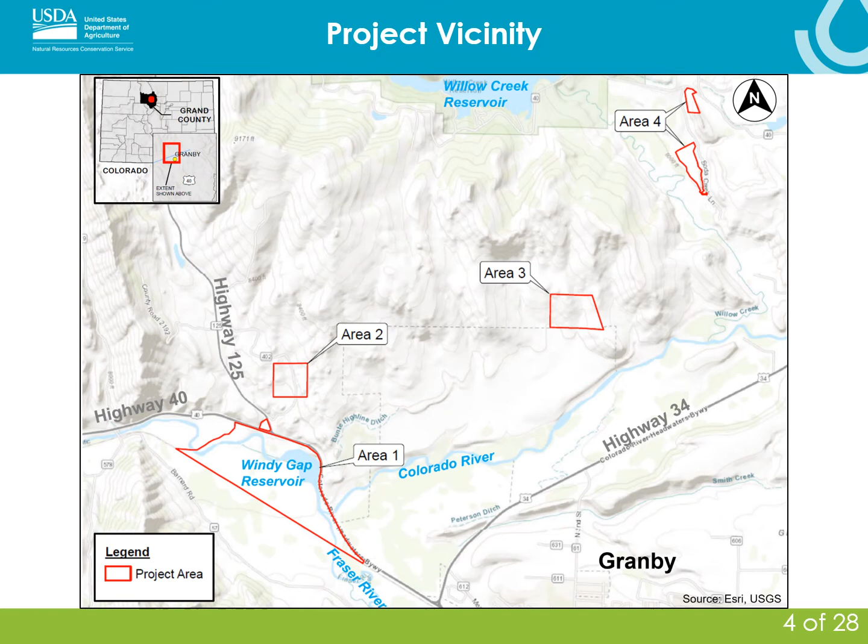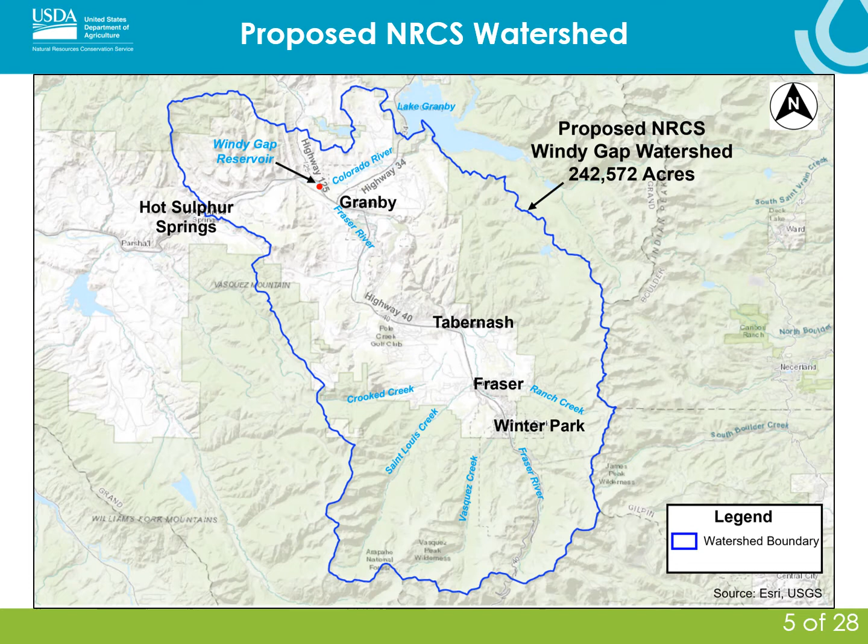Anyone who is not familiar with NRCS or the NEPA process may have some questions at this point, such as, what is a Plan EA? Why are we writing a Plan EA? And what is the purpose of this draft Plan EA meeting? Our job is to inform you as much as possible about this process, and hopefully this presentation will answer your questions. If not, please contact the project team with any additional questions you may have after this presentation.

Since project actions are being funded partially by the NRCS, the federal government, through the Watershed Protection and Flood Prevention Act, also referred to as PL 83-566, an environmental analysis is required to comply with federal regulations. These federal regulations include NEPA and the Council on Environmental Quality Regulations. NRCS complies with these regulations in the form of a watershed plan and environmental assessment. Since that is a mouthful of words, we simply refer to it as Plan EA for short.

A draft Plan EA has been prepared and is currently out for public review and comment. The purpose of this meeting is to provide all interested parties, both agency and public, information on alternatives analyzed in the draft Plan EA, present the results of the environmental assessment, answer questions you may have, and encourage interested parties to submit comments on the draft Plan EA.

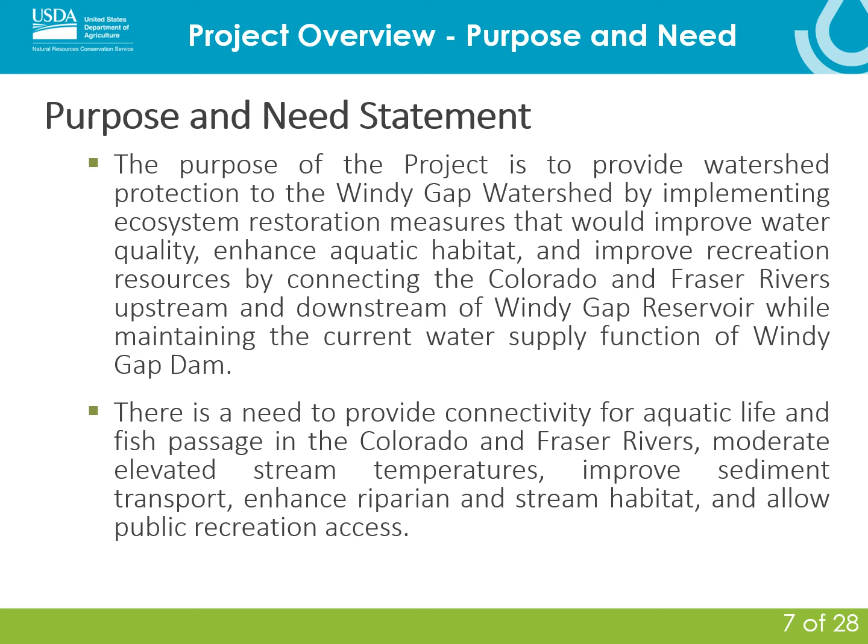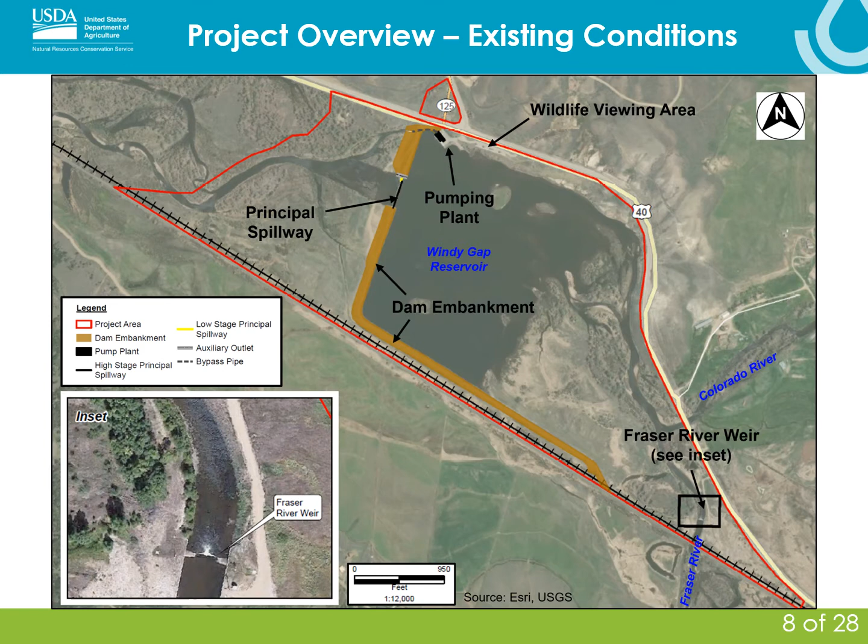In order to meet the purpose and need, the existing conditions of the project area were thoroughly assessed. This assessment consisted of the existing infrastructure as shown on the map. The main components consist of Windy Gap Dam embankment, principal spillway, the pumping plant, Windy Gap Reservoir, and the Fraser River Weir. The existing condition assessment identified that Windy Gap Dam and Reservoir block and impede aquatic life passage upstream in the Colorado River.

The reservoir reduces coarse sediment transport downstream that is conducive for aquatic species habitat and has resulted in stream bed armoring. The reservoir has disrupted normal stream flow through the creation of a slack water environment, resulting in aquatic habitat degradation and increased water temperatures. The existing condition assessment also identified that the Fraser River Weir blocks and/or impedes aquatic life passage upstream in the Fraser River.

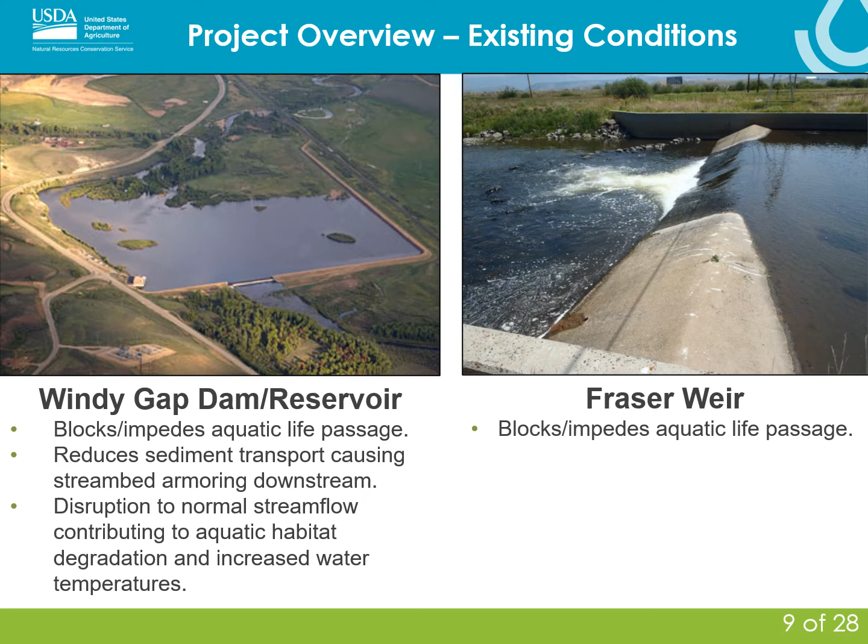A detailed analysis of the project area existing conditions, also referred to as the affected environment, is located in Section 4 of the Draft Plan EA. In order to meet the project purpose and need, multiple alternatives were developed. Many of these alternatives were eliminated from detailed study due to infeasibility, logistics, exorbitant costs, not meeting the purpose and need, or other critical factors. Please refer to Section 5.4 in the Draft Plan EA for detailed information on alternatives eliminated from detailed study.

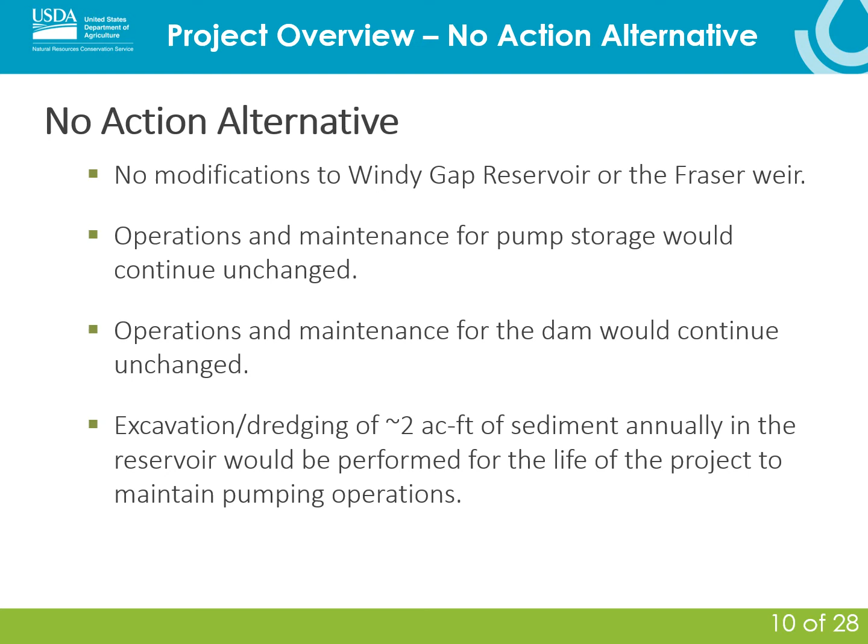Alternatives considered for detailed study in the Plan EA are discussed in Section 5.5 and consist of a no-action alternative and one action alternative that meets the purpose and need for the project. The no-action alternative consists of not modifying any components of Windy Gap Reservoir or Fraser River Weir. Operations and maintenance for the pump storage and dam would continue unchanged. Excavation or dredging of the reservoir would be required to remove approximately 2 acre-feet of sediment annually to maintain current pumping operations for the life of the project.

The action alternative presented in the Draft Plan EA is also the preferred alternative for the project. Specific ecosystem restoration measures that would be implemented in Area 1 include dam modifications, construction of a connectivity channel, and modifications to the Fraser River Weir. Project measures in Areas 2, 3, and 4 consist of borrowing clay, gravel, and rock to construct the alternative measures outlined in Area 1.

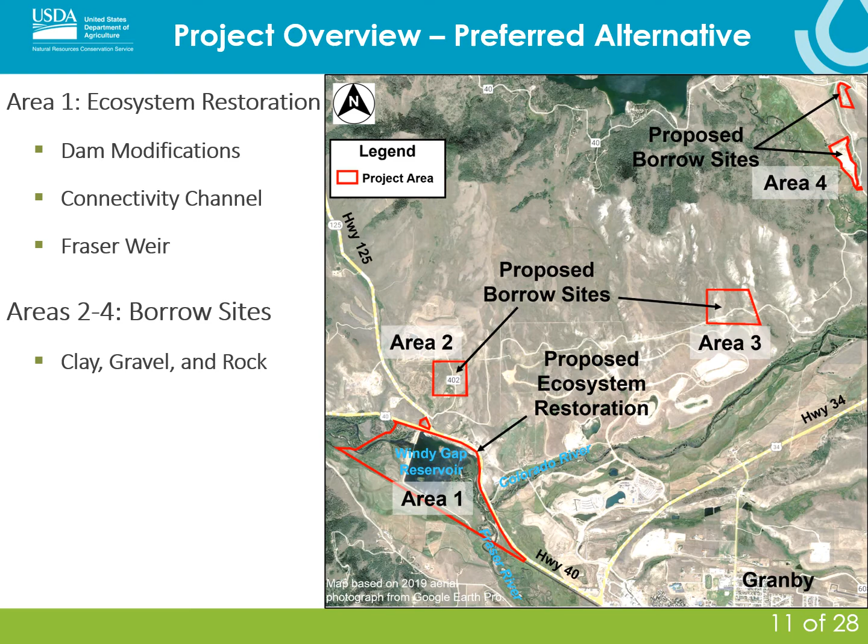Modifications to the dam would be required to separate the reservoir from the connectivity channel. Prior to the start of construction, the reservoir would be lowered so that work would occur on the dry. A portion of the western dam embankment would be removed while the southern alignment would remain in place. A new dam embankment would be installed through the center of the existing reservoir and would match the existing dam embankment. A new overflow spillway would be installed on the upstream portion of the embankment, which would be activated only during flood events. Since the reservoir surface area is decreased, the principal spillway low stage would be raised by 1 foot to match the existing high stage elevation.

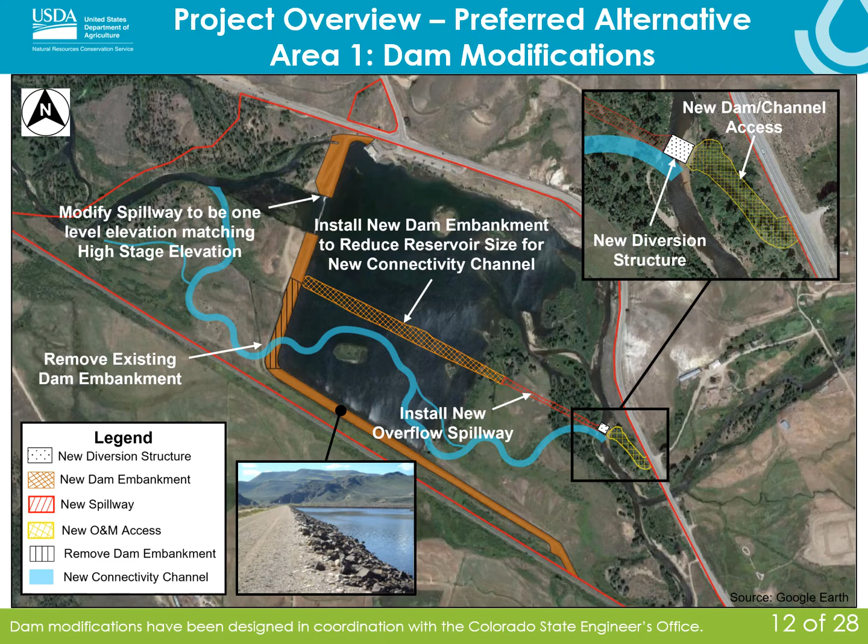A new diversion structure would be installed at the upstream end of the embankment near Highway 40, which would control water flowing into the reservoir. The new connectivity channel entrance would be stabilized with a rock control section and sheet pile installed below the channel surface. A new adjustable gate would be installed along the Colorado River, which could be lowered to allow flow into the reservoir during operations or flood events. A new access road would be constructed off of Highway 40 and a vehicle bridge installed over the diversion structure to allow for operations and maintenance access.

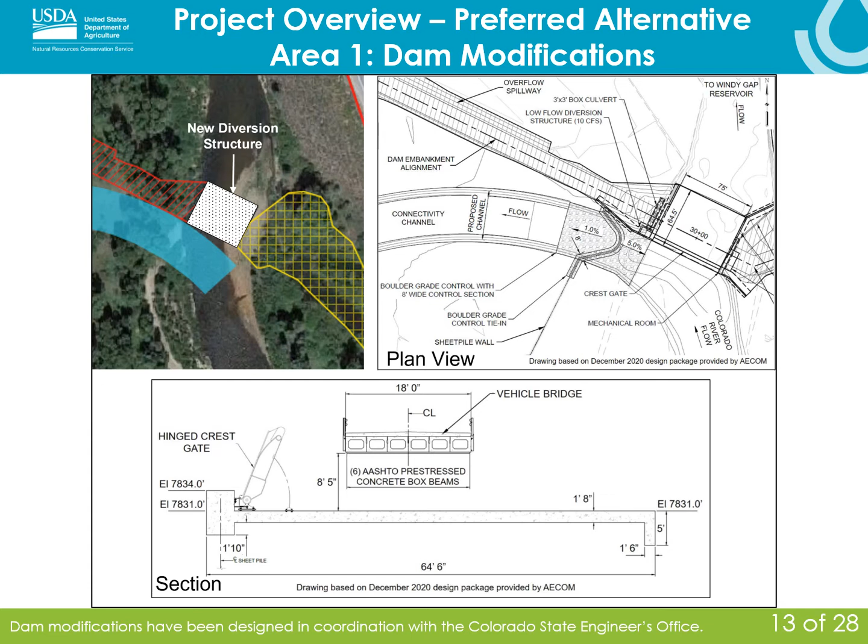A new connectivity channel would be constructed in the area between the old and new dam embankments. This new channel would function as a typical stream channel with associated side channels and floodplain features incorporated into the design. As part of the channel construction, a new riparian corridor would be reconstructed with wetland, riparian, and upland vegetative plants. The existing banks at the downstream outlet would be stabilized to prevent erosion. Overall, the connectivity channel will result in a net increase of 5,580 feet of stream channel, net increase of 18.28 acres of wetland, and net increase of 19 acres of riparian habitat.

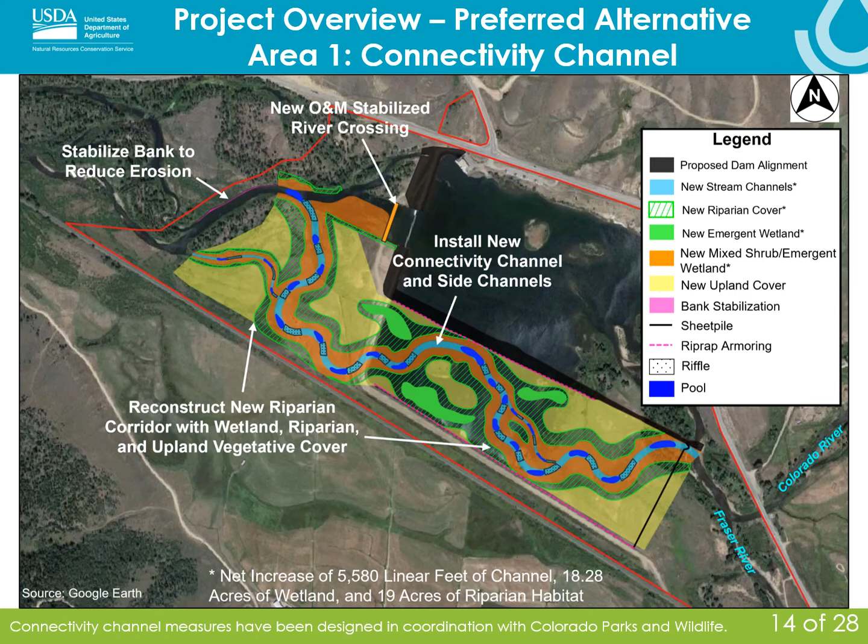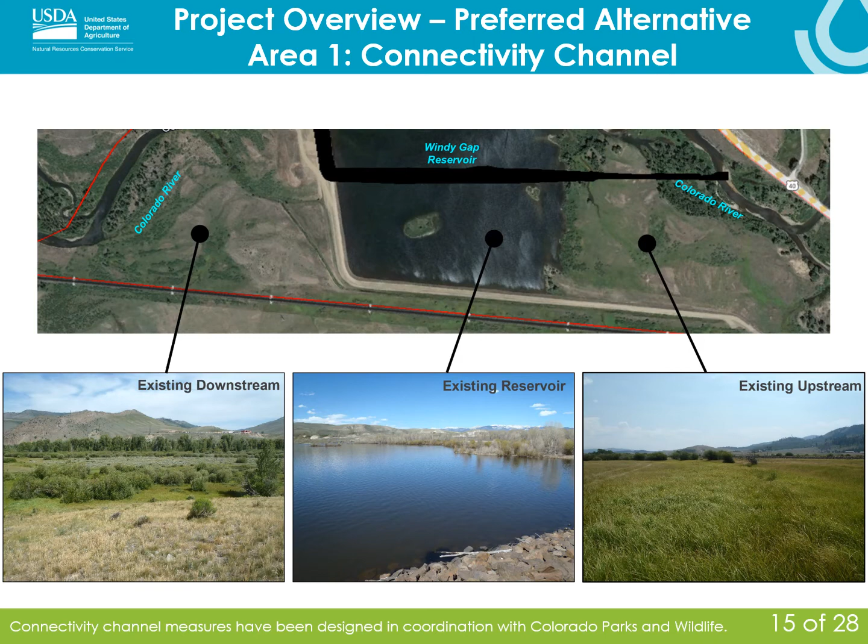The existing conditions of the proposed connectivity channel alignment consist of three different types of cover. Upstream of the reservoir contains open wetland and upland meadows. The reservoir contains solely open water, and downstream of the reservoir contains a mixture of wetland and upland shrubland.

The proposed conditions in the connectivity channel combine the existing conditions, excluding the open water reservoir, into a healthy functioning riparian corridor. The picture shown is an example of the Colorado River upstream of the reservoir that has not experienced the degradation from the installation of the dam as previously discussed.

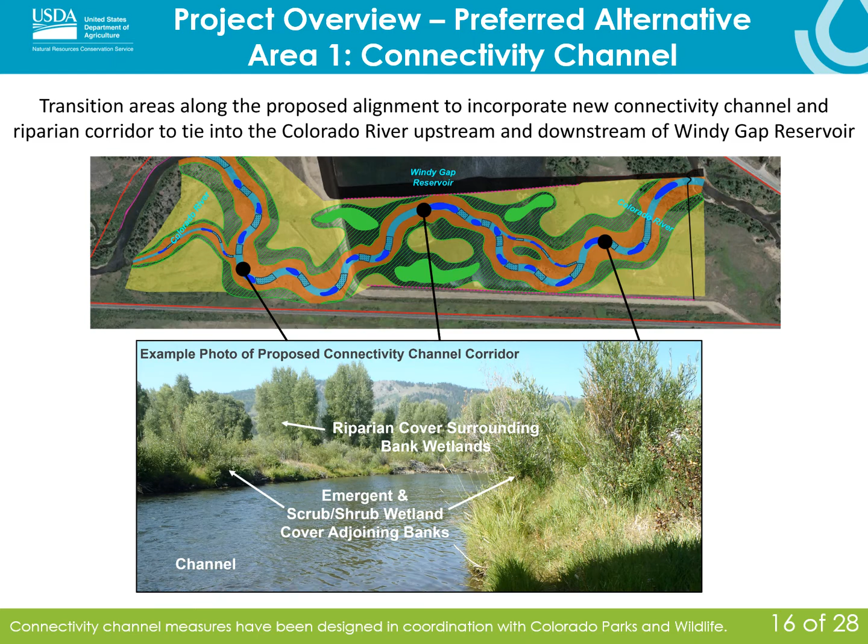Modifications to the dam embankment and construction of the connectivity channel are anticipated to create a thriving riparian corridor containing stream channel, wetland, and upland habitat. This new area is expected to become excellent habitat for fish and wildlife.

Northern Water, who is the landowner, is proposing to open this area for public recreation in 2 phases. The area shown in dark pink adjacent to the reservoir will be open for public recreation after construction completion. The operations and maintenance access road off of Highway 40 would be open for public access.

Note, the official opening for public recreation will depend on the success of vegetation establishment and may occur 1 or 2 years after construction completion. The reason for this delay is to ensure that vegetation has had sufficient time to become established before recreation activities would start that may disturb vegetation along the new connectivity channel.

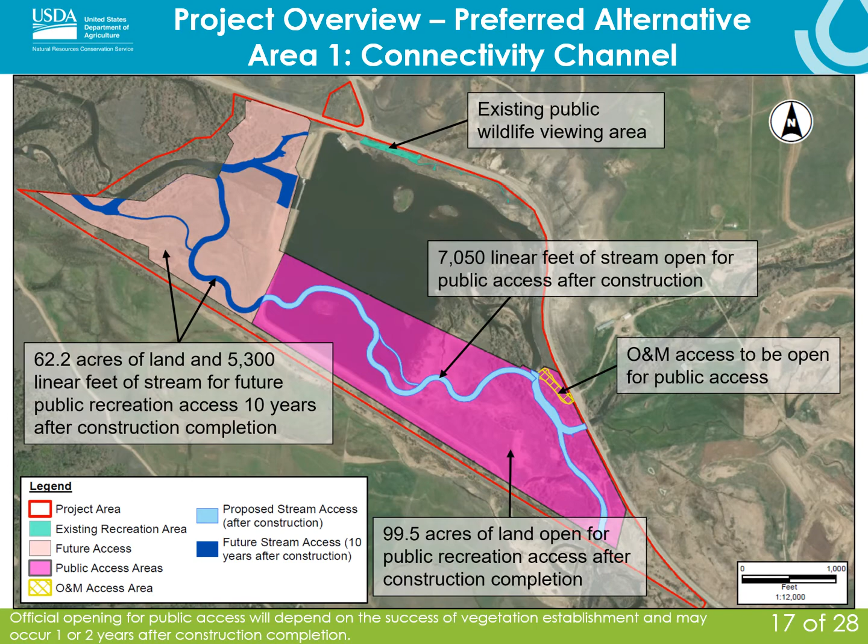The area shown in light pink downstream of the dam would be open for public recreation access 10 years after construction completion. The existing wildlife viewing area on the northern side of the reservoir would be open to the public during and post-construction, and there are no modifications proposed for this area.

Measures are also proposed for the Fraser River Weir, which currently blocks and impedes aquatic life passage. Measures would be installed to provide upstream aquatic life passage through the installation of 2 rock weir structures downstream of the existing weir and regrading the channel bottom.

The existing weir would be left in place and flow monitoring of the Fraser River would still be maintained. In addition, a new vehicle crossing would be installed in the bottom of the channel for operations and maintenance activities, as there is not a crossing currently at this location.

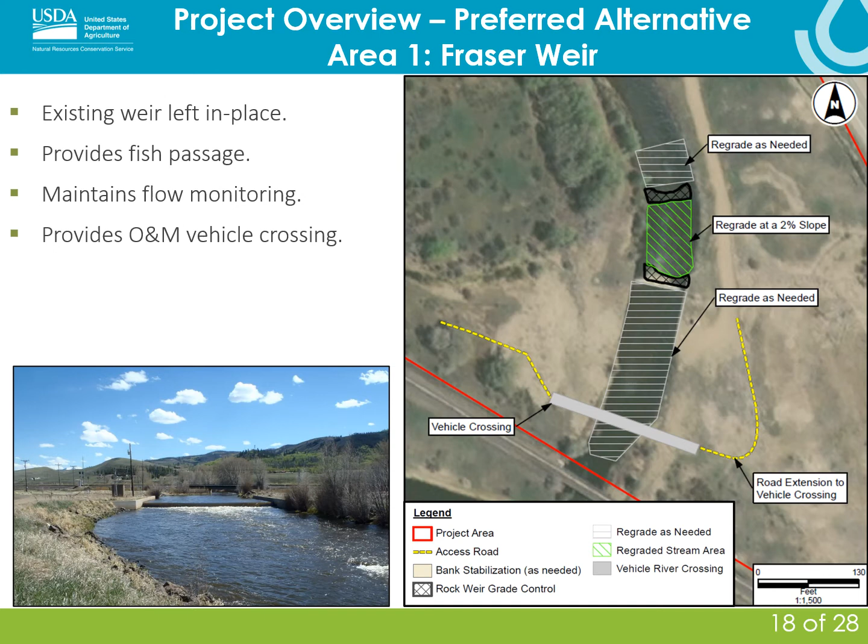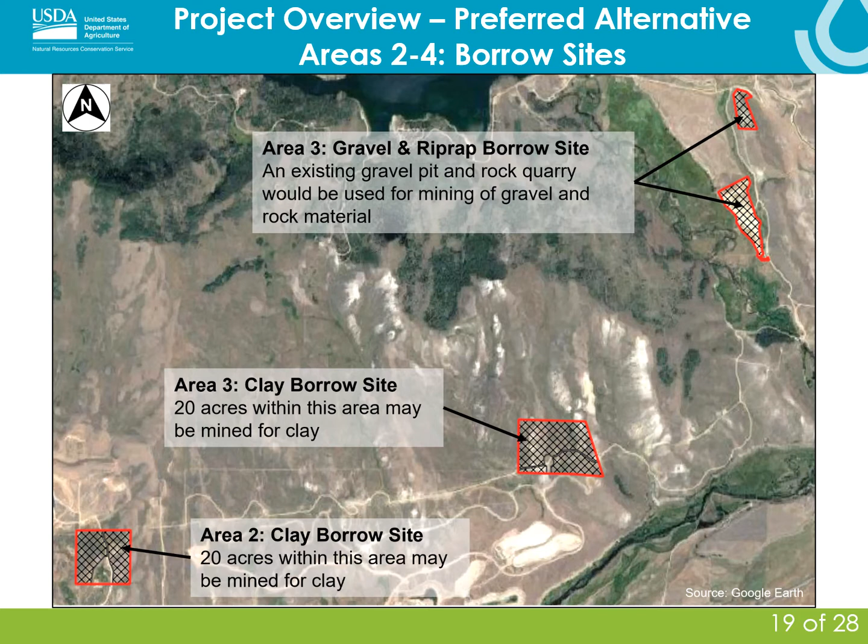Project measures that I just discussed constitute the preferred alternative. The next 5 slides analyze the preferred alternative impact on the environmental resources and summarize the environmental consequences section in the Draft Plan EA. Those of you interested in the detailed descriptions, please refer to the Plan EA section 6.0 Environmental Consequences.

For purposes of this Plan EA, short-term refers to during construction and shortly after, which is about 2 years, while long-term refers to the evaluated life of the project, which is from construction completion to 100 years. There is a lot of information in the following slides, so please bear with me as I explain the environmental consequences of the project. I will start with the adverse short-term impacts anticipated during construction.

There will be a temporary increase in upland erosion on disturbed land. These impacts will be offset by the installation of best management practices, herein referred to as BMPs, to reduce erosion potential until ground cover is established. There will be a temporary increase in water turbidity discharged from the project. Impacts will be offset by the installation of BMPs in order to reduce turbid water discharges.

Habitat will be temporarily disturbed, including water, wetland, riparian, stream, and upland. These impacts will be offset by restoration of disturbed areas after construction and the creation of new habitat. There will be a temporary increase in emissions and fugitive dust from construction traffic. These impacts will be offset by complying with air quality standards as well as the installation of BMPs.

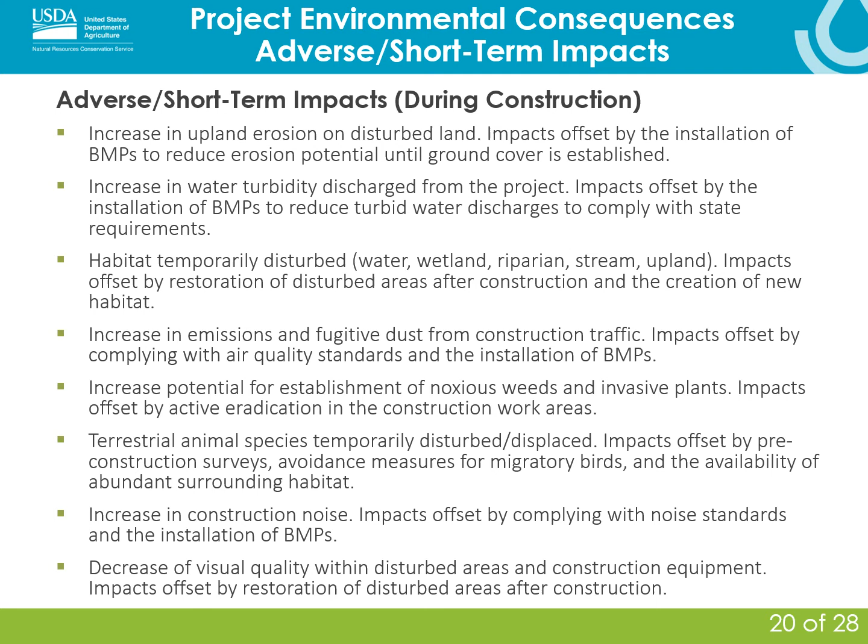There will also be the increased potential for the establishment of noxious weeds and invasive plants naturally and as well by recreationists bringing them on site. These impacts will be offset by the revegetation of the project area, as well as the development and implementation of a post-construction rehabilitation plan. Recreationists will be held accountable to follow the rules and requirements established by the state for invasive species.

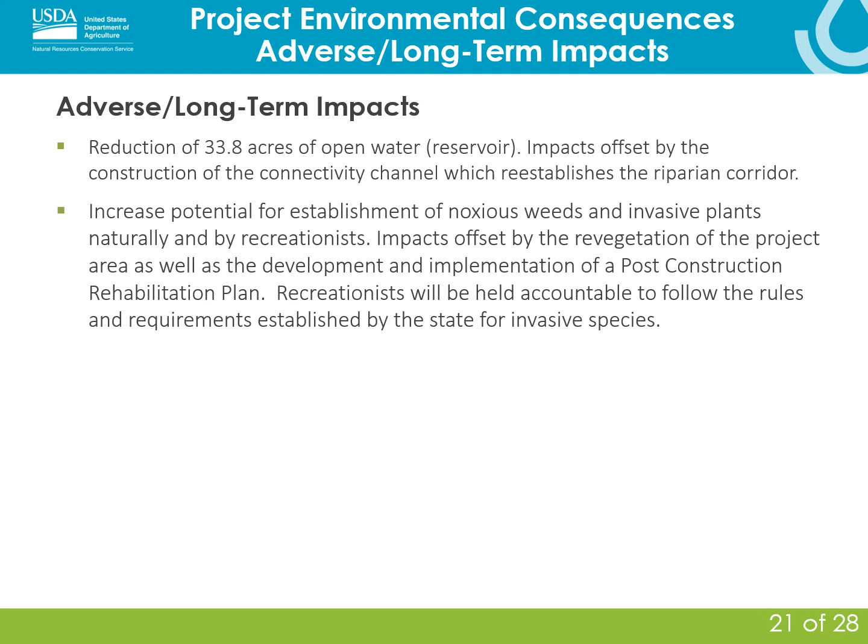Most beneficial impacts from implementation of the preferred alternative are long-term, so the short-term impacts is the shortest list of impacts for the project and consists of minor benefits to socioeconomic conditions from additional employment requirements for construction. This is anticipated to be beneficial to the immediate area surrounding the project.

The beneficial long-term impacts for the preferred alternative are the longest list of impacts, and this is a good thing for the restoration of this ecosystem. Specific beneficial impacts include a reduction of sedimentation into Windy Gap Reservoir and the reestablishment of coarse sediment transport downstream, alleviating gravel depletion and streambed armoring. There will be a reduction of water temperature due to decreased water detention times in the reservoir.

There will be a net increase of 5,580 feet of stream through the construction of the new connectivity channel. There will be a net increase of 18.28 acres of wetlands associated with the new connectivity channel. There will be a net increase of 19 acres of riparian area associated with the new connectivity channel. And there will be benefits to aquatic species through improved aquatic habitat and by providing connectivity for aquatic life passage in the Colorado River.

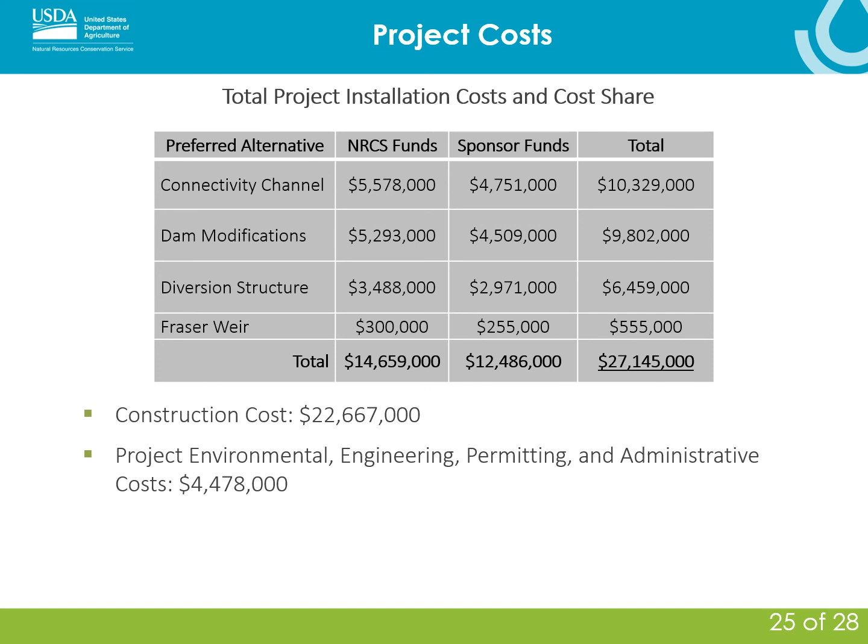The NRCS funding process is broken into 3 phases: planning, design, and construction. We are currently in the planning phase, and the draft Plan EA comment period ends on March 10, 2022. So please submit any comments before that closing date. As of right now, the project team is anticipating issuing the final Plan EA and finding of no significant impact in April 2022. After the planning process is complete, the design can be finalized, and this is anticipated to occur in May of 2022. Construction may begin after the design is complete and is anticipated to occur from May through November over the course of 2 years, which are 2022 and 2023.

Detailed information on the alternatives, environmental impacts, costs, and economic analysis can be reviewed in the Draft Plan EA document, which is available for download on the NRCS website. We encourage interested parties to submit comments for the Draft Plan EA, which can be sent by email to windygap@adaptiveenviro.com, mailed to Adaptive Environmental Planning, or give me, Greg Allington, a call on the phone. The comment period is open through March 10, 2022, so please send any comments by that date to be included in the public record. We appreciate your interest in this project and look forward to hearing from you.